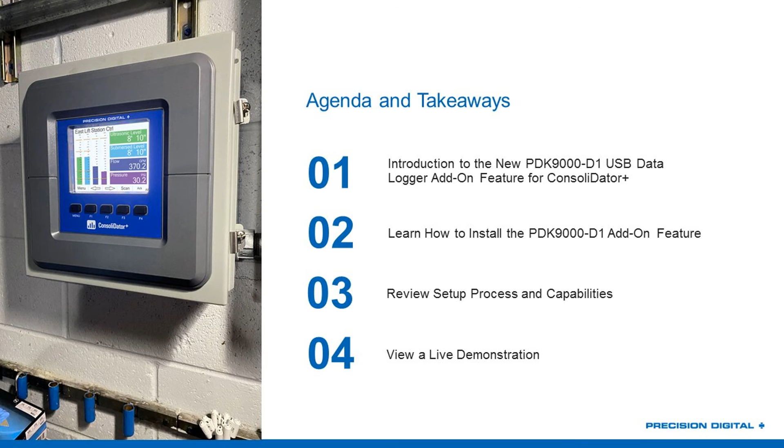We're going to take a look at how the setup of the data logging goes and what the capabilities of it are. And then I'm going to show you on the demo I have here on my desk what that actually looks like in practice. There's not a whole lot of hardware changes that happen when you get the data logging feature, but I think it'd be nice for you to see it and how it works.

So for starters, the PDK 9000-D1 is an add-on feature for the ConsoliDator Plus. This means that you can buy it at the time you're buying any ConsoliDator Plus as an additional features package, or it means you can add it to any previously bought ConsoliDator Plus that's already installed in the field at a later date. It is a data logging feature, so what does that mean?

Well, it allows the ConsoliDator Plus to data log to a USB flash drive. You're, I'm sure, all familiar with those USB flash drives. Some people call them thumb drives, but essentially it's a small little drive that plugs into a standard USB port. You can create data logs that contain the same type of process data that you can display on the ConsoliDator Plus. So you actually build your data log and tell it what you want to have in each log.

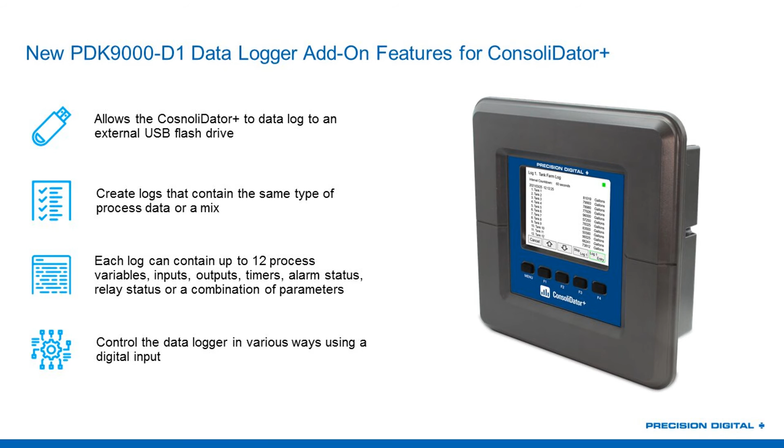Each one of the up to 8 logs that you can have can contain up to 12 process variables. And those could be your actual PV inputs, your milliamp input, pulse inputs, the status of your relay or 4-20 outputs, your timers, alarm statuses, the actual relay status, or any combination thereof. So whatever information you want to have in your data log, that's the information you can put in your data log. And you can also control the data log in various ways, which we're going to take a look at in a few slides. But basically what that does is let you trigger when a log happens.

So how do you actually install this data logging feature? Well, there's really 2 ways to do it. You can get it when you buy your ConsoliDator Plus new from the factory, or you can field install it. If you buy it from the factory, then along with your ConsoliDator Plus part number, you order that PDK 9000-D1 part number. And if you do that, then we're going to go ahead and install this feature set at the factory. We're going to ship it out to you with the USB stick, and it'll be just one combined product, and you won't really even need to worry about it being a quote-unquote add-on feature.

Now, if you buy it as a field installation, then you're going to order that PDK 9000-D1 separately. We're going to give you a key that you then type into your ConsoliDator Plus that's based on the unique identifier number of your unit. And that's going to unlock the ability to use that data logging feature.

Now, a few things to note about that. We will ship you out a USB drive if you order it after your ConsoliDator is already shipped. Certainly not all USB drives are created equal, and some are better than others. We have a preferred USB drive that we use, which is a 32 gigabyte SanDisk USB drive. So even if you think you have a bunch, we'll send you out one to use for this.

And it's also useful to note that this requires ConsoliDator Plus firmware version 2.2, which is a very recent release. So if you have a ConsoliDator Plus that's been in the field for a year, well, we can certainly get the data logging feature added to it. However, it's going to require it to come back to the factory for a refresh of the firmware. So certainly at this point forward, any ConsoliDator Plus units that are sold can have that USB feature added, but you have to be somewhat new to today's date in order to get this feature unlocked.

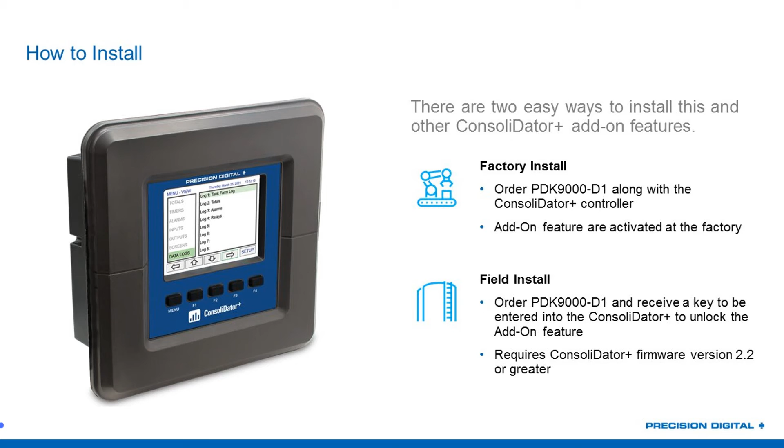So how do you set up the data log? Well, all the data logging setup is done on one screen. So here is your data log screen. In theory, there are actually 8 of these log screens you could have, because you could have 8 different data logs all being triggered on different events or logging at different intervals containing different information. But each one of those 8 data logs has a screen set up that looks very much like this. And this is what it looks like in the software that you use for setting up the ConsoliDator Plus, as well as if you were to use the front panel push buttons.

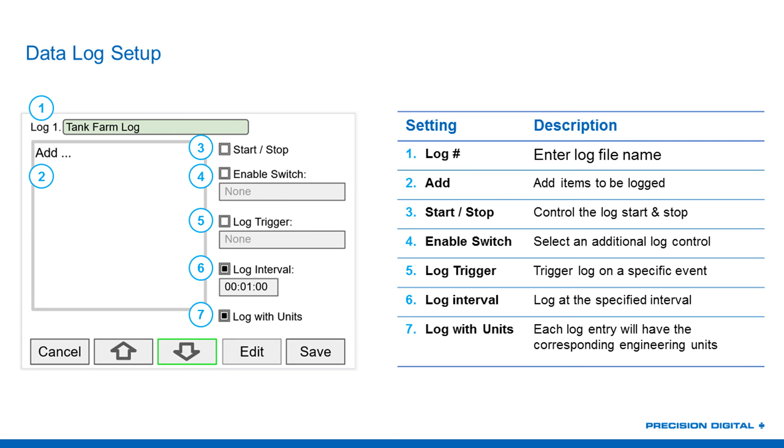And you've got your log number at the top, so you've got logs 1 through 8 over here. Then you give each one a name. You can add the items that you want to have in it. And then you've got these checkboxes with drop-downs or easy-to-enter menus here that set how that data log is going to work. And we're going to walk through each one of those so you really have an understanding for what the data log is capable of.

So the first thing you're going to do is you're going to add your items to be logged. So these are the up to 12 items that you want kept track of in that data log. And these could be your milliamp inputs, your digital inputs, perhaps Modbus inputs that it's either pulling in as a master or a client device, or that's being written to it as a slave device or a server.

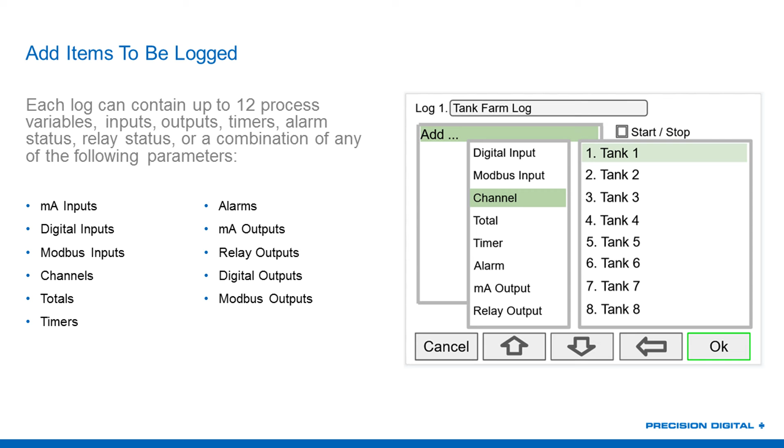You can get your channels, your scaled engineering values, your totals, your timers, milliamp outputs, really anything you could want that a ConsoliDator Plus is going to do for you, you can have as one of your 12 selected items.

Then you've got a selection for the start-stop. And again, you're going to notice that these are very easy to set up. And what I mean by that is if you want to have the start-stop feature that we're about to talk about enabled, all you have to do is check that checkbox. Or in reality, you'll note you put a little dot inside of the box.

So these are not sort of esoteric things where you've just got a parameter there, and then you've got a 0 or a 1, and you've got to choose what you do with it. No, these are checkboxes, drop downs, and easy to understand menus. That's one of the advantages of the ConsoliDator Plus.

And so what specifically the start-stop function does is it allows you to give the operator or give the system the ability to start and stop the logging process. So if you don't have this checked, then logging is going to just be done automatically. It's going to log based off whatever you tell it to as far as the interval or the event at which it's logging.

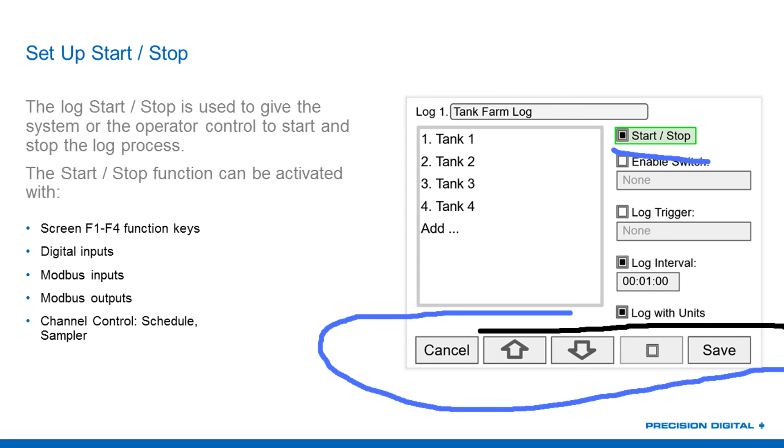But if you want people to have the ability to start and stop the data log, great, you check that box, and now they can add it as a function key down the bottom of their ConsoliDator. One of those keys on their screen could be start and stop the data log. You could start and stop it with digital inputs, Modbus inputs, Modbus outputs. You could even have a channel control it. So you could set up a schedule for it to run at specific times.

I could have that be a PLC digital output coming to our digital input. It could be that I only want it to start data logging when I'm in a certain alarm state, or an annunciator channel is triggered, or one of my relays goes off. So there's different ways you can tell it, all right, I want you to only log in a case where I really care about the data log. I don't need it to just be logging 24/7. So if this trigger happens, then start your data log.

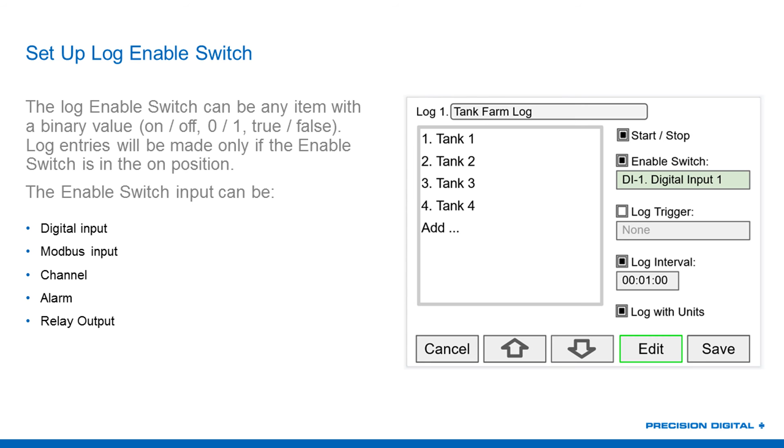Then you've got your log trigger, which sounds a little bit like what we just talked about, but it's slightly different in that the trigger makes one entry whenever that trigger occurs. So for example, I could have a digital input where someone walks up to my panel, pushes the button, and when they do that, it makes a log entry. It doesn't start the log to run forever like what we just discussed, so long as that switch is on, it logs. No, this is just an individual discrete point where this thing happened, and now I'm going to log.

So if I wanted to log every time a specific alarm goes off or every time a relay triggers, I can do that. If I wanted to log every time I get a signal from a PLC, I can do that. And it'll just take the single log.

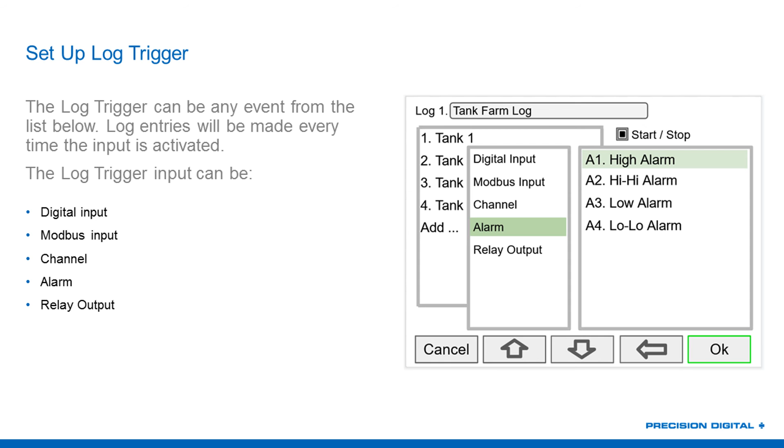The most common way, of course, people log is that they just log by time. They want to make a log entry every so many minutes, hours, days, seconds. So you can set that log interval up from 1 second to just about 100 hours. And every time that time gets elapsed, it's going to make a log entry.

So if I really want to know what's going on with this process, I can set it up to log every second. More likely, I'm only going to be interested in this log every 24 hours or maybe once a week. And this is another interesting point for me to remind you that you get those 8 different data logs, right? So I could have some really critical data coming in here. I've got tanks, for example, that are being filled and unfilled all day, every day.

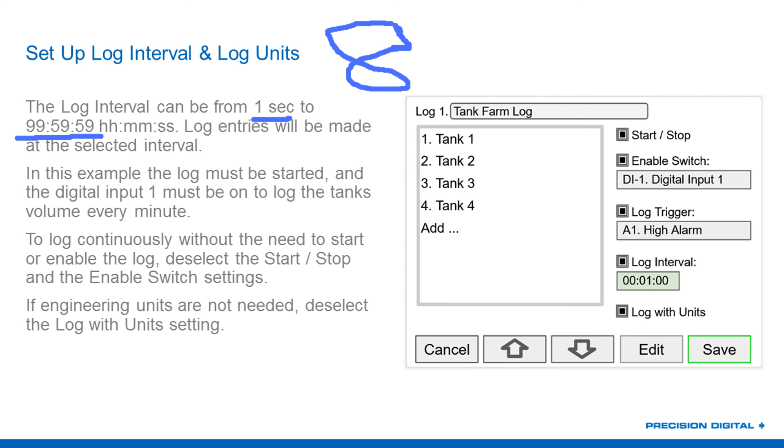And let's say every hour I want to take a reading on those just so I know where they stand. But then I've also got some flow meter totals that maybe I only care about once a day. And so I could set one data log up to log every hour, and I could have my tank information in that. But then I could also set a data log up to run every 24 hours and have that second data log only contain my totalizers. So one more advantage of being able to have those 8 different configured logs.

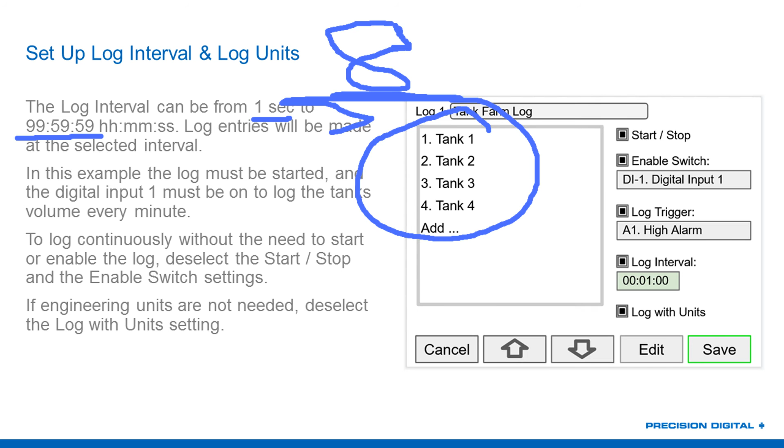These are logged as a CSV file, or a comma-separated value file, which is a file type that, for example, Excel is going to just recognize. You can open it right into Excel. However, it's program agnostic. It is not an Excel file by default. If you prefer some other program, that's great. You can certainly bring it into those.

And in case your oldest log data really is valuable, there is the ability to stop when full so that you don't overwrite any logs. Now, I say stop when full, but let's take a brief moment and just talk about what being full actually means. When we send you a USB stick, or when you get it with your ConsoliDator Plus because you bought it at the same time, you get a 32 gigabyte USB stick.

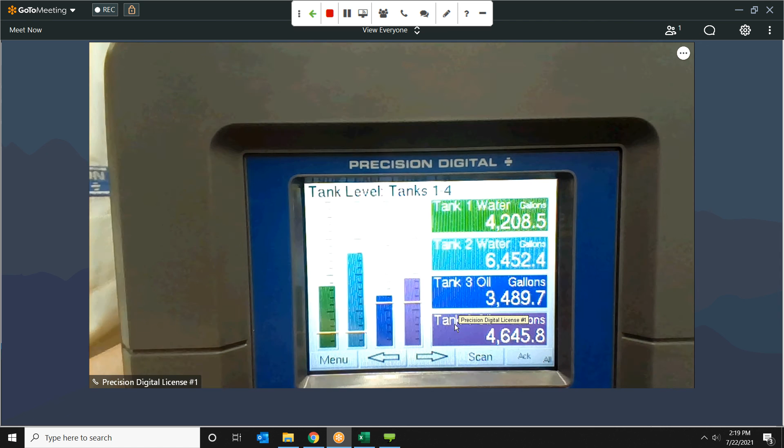And with that, let me pop open my camera share here. All right. So here is a quote-unquote standard screen for the ConsoliDator Plus. On it, I've got tank levels 1 through 4 as my screen name. I'm using it to show my 4 tanks. Tanks 1 and 2 are water, tanks 3 and 4 are oil. Each one of those has a nice, easy-to-read number on it, color-coded to the bar graph that it's associated with. And you've got commas and decimals in there that you can easily see from distance. At the bottom, I've got my 5 soft keys that I can program to do whatever I want for this screen.

And so to data log this information, if I actually open up that file, it looks something like this. What you can see here is I've got my title for the data log. In this case, I've named it tanks 1 through 4 log. Very creative, I know. Same thing with my ConsoliDator tag, very creative, multivariable controller. And then I've got my time and date stamp. And I've got each one of my 4 tanks being data logged with their units, so I happen to know that they're all gallons.

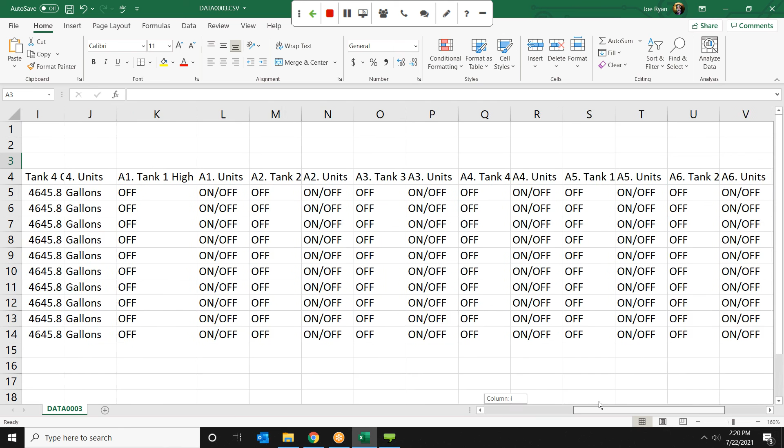Now I'm also choosing to log the alarms associated with those. So I've got my alarm 1, tank 1 high alarm, and the units, which are just on off because it's an alarm. But that's going to give me the information as far as what the state was of all of my alarms at that time. So there's my tank 1 high. You'll notice, by the way, I opened this in Excel because a CSV file opens in Excel very easily. And there's the rest of my alarms. I've got a high and a low alarm set up for every one of my tanks. So there's my 12 variables that I've got logging into this.

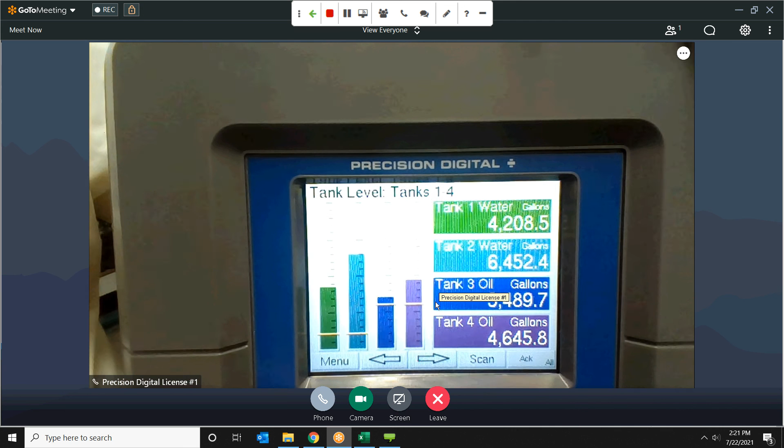If I wanted to set up the log manually and not use the computer software setup, I'd go here to my setup. I'd scroll down to my data logs. And you can see here I've got 2 logs going, one for my tank level and one for my totalizers. And if I go into my tank 1 through 4 log, there's my setup. It looks exactly like the screen I showed you earlier, which is how it appears in the setup software. So here are my individual data log contents. I just added those variables in there, my 4 channels plus my alarms. You know, those checkboxes for each one of those data logging settings that we talked about.

If I wanted to edit, I just click edit. And for example, if I want to remove one of these from my data log, there we go. I can just take tank 4's low alarm and edit it, change it, move it in the location in the data log, whatever I'd like to do. If I wanted to add something else in, great. I just say I'm done. I go add something else. I've got a whole lot of capabilities programmed up in this demo unit here. So, I don't know, let's go add this tank 1 alarm horn, which is an alarm to run my horn and light attached to this ConsoliDator demo. So I add that in there and done. I click done, and now I've changed what the data log is doing.

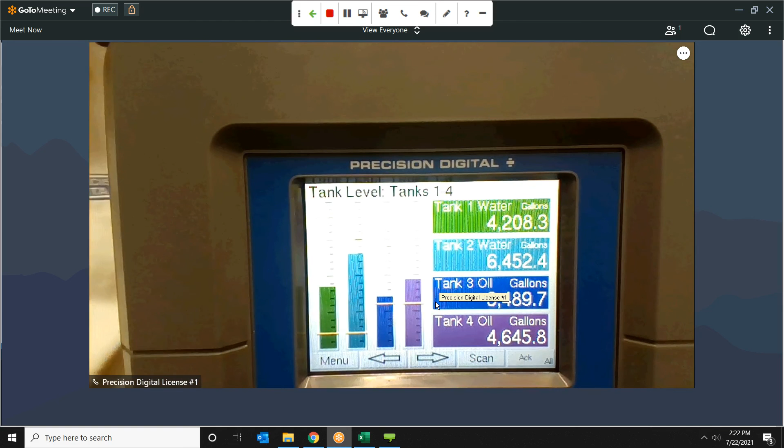Hardware-wise, how does that whole USB stick element play into this? Well, let's take a look, shall we? Flip this around. So on the back of my ConsoliDator Plus, I have all of my I/O cards. That's what you see over here. And then I've got my standard features plus 2 optional features, my Ethernet port, which allows it to have Modbus TCP/IP. And the other optional feature here is my USB host with the USB drive in it. So when you get the data logging feature, this is the port that will activate for you, this full-size USB port.

The micro USB port is a standard feature that is always there on the ConsoliDator Plus. It's what you use to connect up to the software. So you don't obviously use the micro USB port for your USB stick. You use that USB host, and you don't use the USB host connection to plug in to use the software, which is why it's actually not present on most ConsoliDator Pluses. If you don't get the USB data logging feature, this USB host port is covered up. It's not present for you.

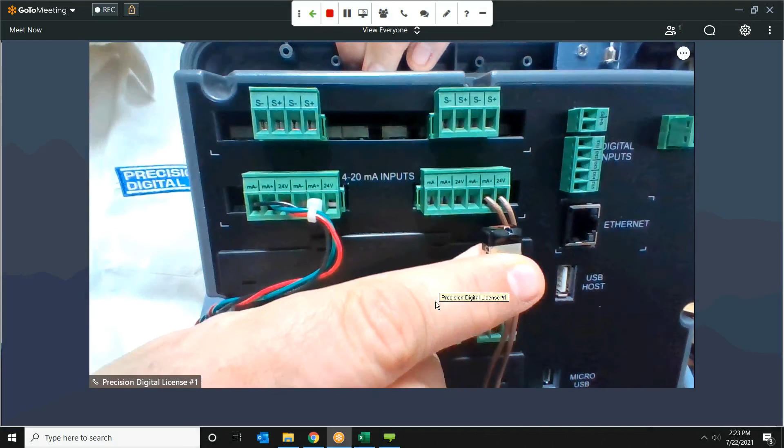And so all I have in that is this tiny 32 gigabyte USB drive. And what is great about this specific 32 gigabyte SanDisk USB drive is it is very low profile. When it is in the ConsoliDator, it comes out less than the width of my fingernail. These pluggable connectors actually poke out further from the back.

And what we found during our own testing is that's a great feature, and one of the reasons we recommend this specific drive, because it means that your USB drive is not going to get banged around. If you put your standard USB drive in there that's a couple of inches long, and you have that sticking out from the back of your panel, it's going to get hit by wires, it's going to get hit by people's arms and elbows when they're working on this panel, and you run the risk of it being pulled out, having it get dropped and lost, having it be jerked free, or even potentially damage the drive.

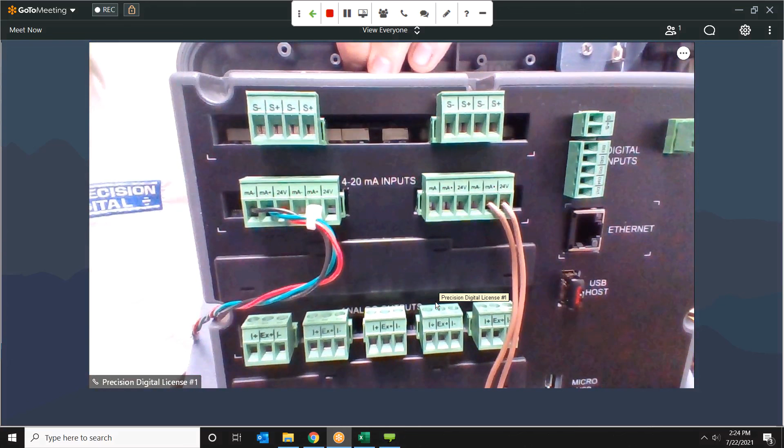And so using a small, low-profile drive lets it stay nice and flush against the back of the ConsoliDator so that in the panel it doesn't risk being jostled, damaged, or disconnected in any way. Another nice feature of that drive is that when I take it in and out of the ConsoliDator Plus, like I just did, if I come out here and I pull this drive, well, obviously it has stopped data logging onto the drive. However, the minute I plug it back in, it's going to start data logging again.

So if I've got it set up for interval logging, which I do, where I'm just taking a reading every few minutes or seconds or hours, it's just going to pick right back up again. I don't have to go in and confirm anything. I don't have to tell it that I put the drive back in. So you don't run the risk that someone's going to want some data off of it, pull it out, bring it back, plug it in, and then forget to re-enable it, and all of a sudden you're no longer data logging. That is not going to happen. It's just going to pick back up with the data log.

It will, however, make a new file every time I pull it out and plug it back in again. So in that data log folder for data log 1, it's going to create a new CSV file every time you plug it back in, which is a great feature because it adds the ability to see when your data log USB stick was removed. Now I'm going to see that there's a break there because somebody unplugged this, and I can compare my data, figure out what the story is, and if there was a critical data point that happened in that window, I'm going to know that, well, I didn't capture it because somebody unplugged the drive from the back of the ConsoliDator.

So hardware-wise, it's very simple. You've just got that one USB drive that gets added, and then you just set up your data logs through the front of the ConsoliDator Plus, or preferably in the software. That's my preferred method of doing it.